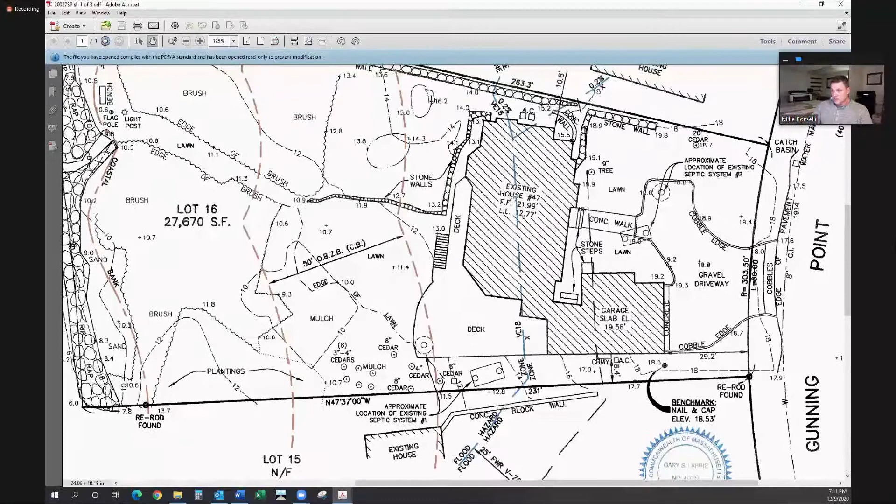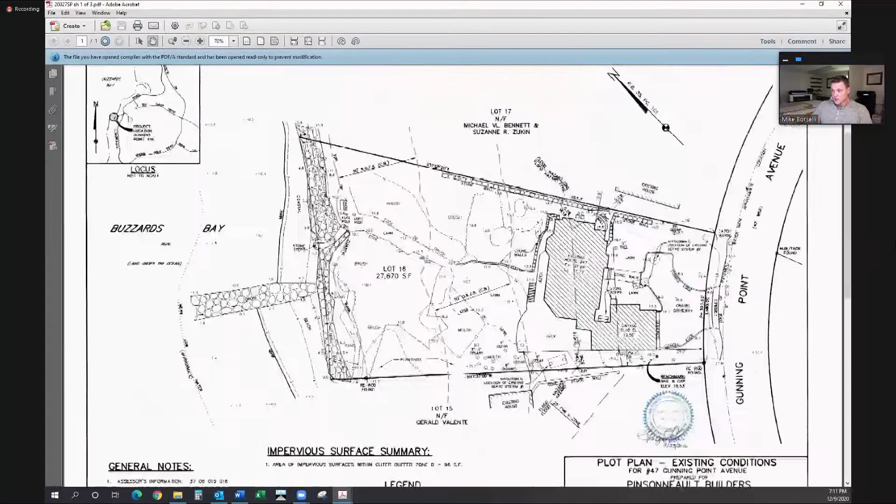In addition, a portion of the lot is in land subject to coastal storm flowage. In this case, it's flood hazard zone VE elevation 18, the boundary of which is shown as a blue line. It meanders through the site and through the existing house. And of course, parallel and 25 feet landward of that is the Falmouth Wetlands regulation velocity zone. So a significant portion of the existing house is in a velocity zone.

The site has typical landscaping and lawn and driveway areas. There's a septic system under the driveway, and there's actually 2 septic systems. There's another one over on this side of the property, both of which are to be pumped and removed and would no longer be part of the project, and a new Title V system will be installed.

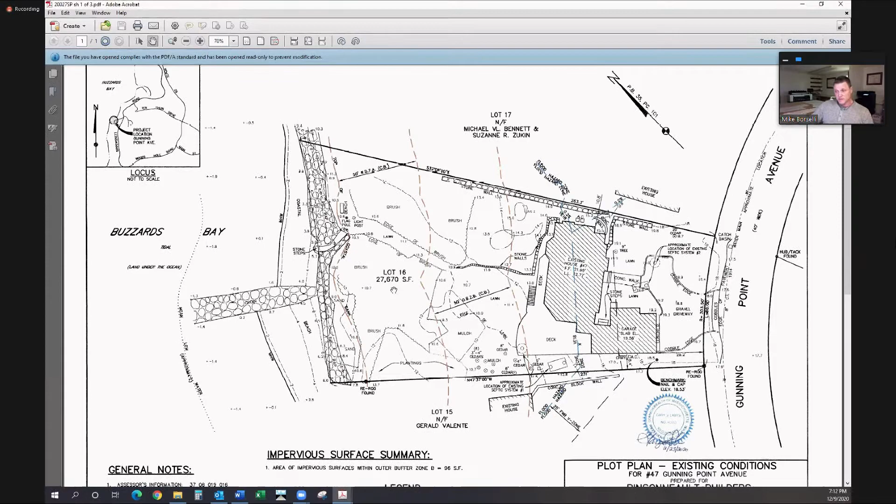There is a significant vegetated buffer located between the top of the revetment and the formal landscape portion of the yard. There is a path leading through the buffer. A lot of the buffer is natives, and there's also a lot of invasives. I've outlined here a small section of the structure, impervious surfaces in the outer buffer zone B.

The proposed plan. Oh, I'm sorry, there's the existing plan again. Now comes the proposed plan. And the proposed plan shows the house to be reconstructed. If you look closely, I've also added some notes that I'll speak to as I make the presentation. The proposed plan shows the outline of the existing house in a red delineation. So this is a raze and reconstruction project, and all of the work is proposed in the outer buffer zone B. No work is proposed in any no disturbance zone A. And the structure is effectively being rebuilt within the general same footprint with some slight deviations.

As I made reference to earlier, there are 2 existing septic systems that are proposed to be removed. A new Title V septic system will be installed in the driveway area, outside of all wetland resources, outside the buffer to the wetland resources, and outside all velocity zones.

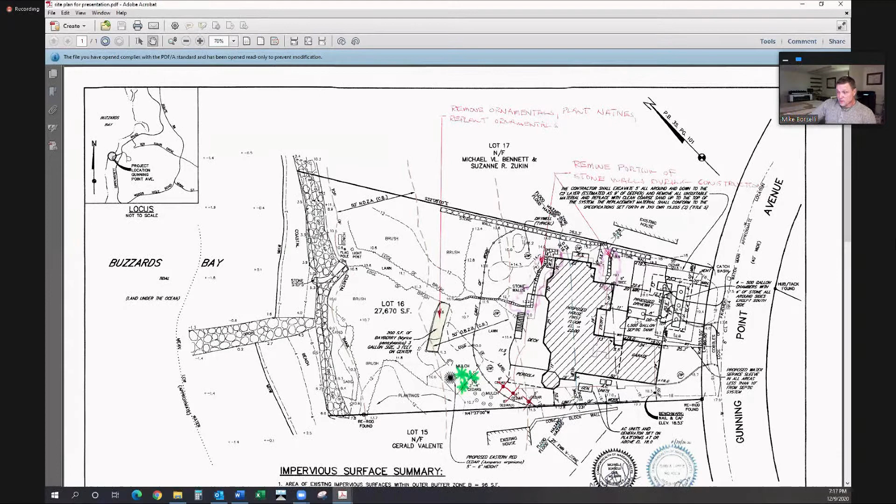Another matter raised by staff was what will happen to the existing stone walls. There are 2 landscape walls that ease the slope around the existing house. During the demolition and reconstruction of the house, these areas I've circled in highlighter would be removed and then reinstalled in the same place after the house construction occurs.

So they'd be temporarily removed during the demolition and then reinstalled and blended back in with the walls that would remain. The walls that would remain would be here, and then this wall along the property line. These are low profile landscape walls. So we will submit a revised plan that also indicates that.

So the site has been designed to meet the standards outlined in your regulations for redevelopment under FWR 10.18. All the disturbances proposed are in areas that were previously disturbed, and no additional alteration to buffer other than the cedar trees identified would occur.

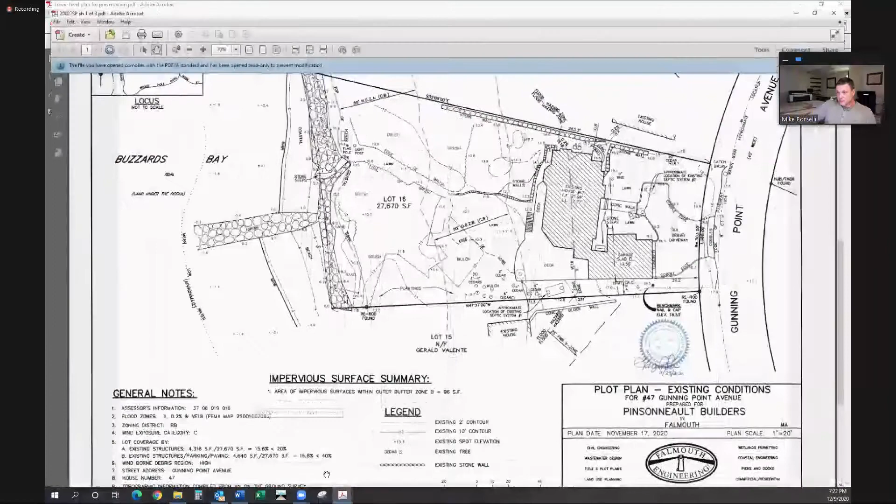I think I covered the project proposal, and I also touched on things that staff had brought up in the report in my conversations and how we intend to revise the plan. So we wanted to hear your comments and see if there are other revisions we may need to make. And then after that, request a continuance, submit revised plans, and hopefully be able to close the hearing at your next scheduled hearing night. And with that, I will be happy to answer questions.

Thank you, Mike. Jen, do you want to start? Sorry, I was on mute.

No, I think Mike gave a pretty detailed presentation, including the staff's concerns. Initially, we were having conversations with Mr. Borselli regarding the storage. And again, when we saw the plans and saw that there was a garage, which we usually allow that 400 square feet - that's kind of what the board's been doing when the entire structure is in a velocity zone and there is no enclosed space, such as a garage. So that kind of changed our thoughts a bit.

Mike was understanding to that. So that's great. Mike, the only other question I had - Alyssa did a great job of reviewing the plan and questioning certain aspects like the stone walls, the placement of the mitigation. So that was all addressed.

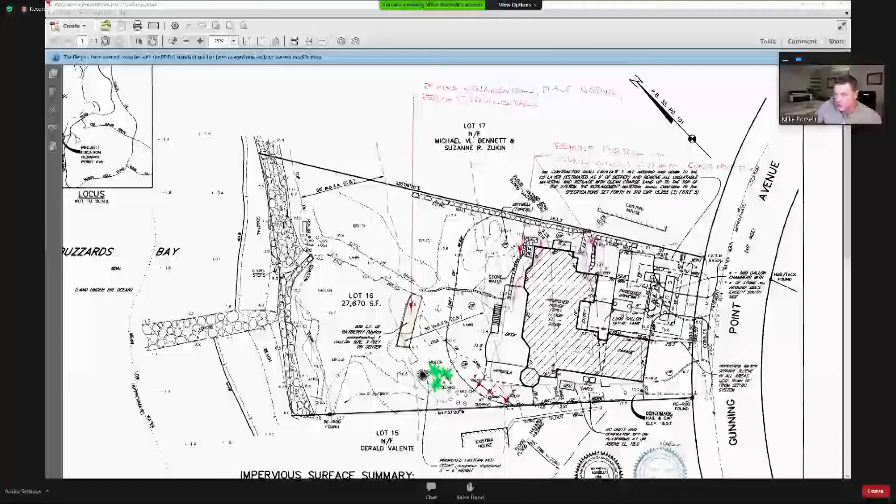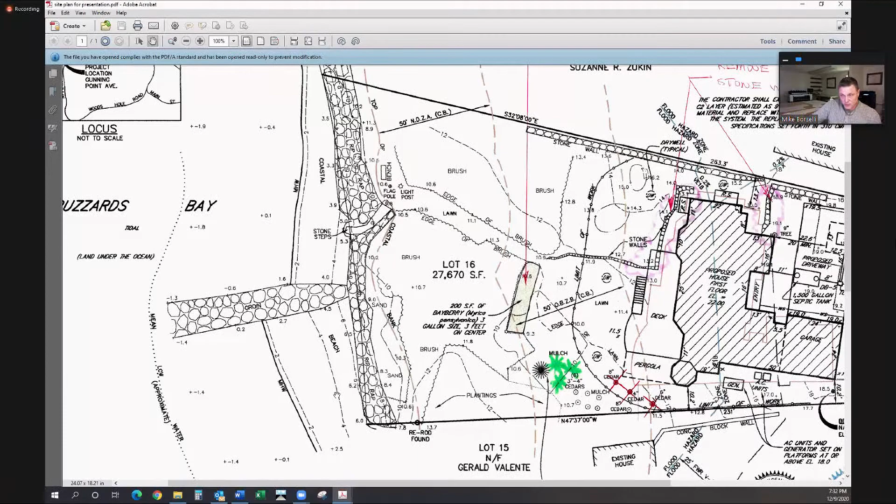Sure, thank you. So I believe Mr. Eater's talking about the fact that this line here isn't as thick as this one. That wasn't by intention. We will make that thick, and we will add right here that Salt Pond Area Bird Sanctuaries is an owner of a strip of land here. In fact, they were notified as an abutter, and we received an email from Katie Taylor of Salt Pond Area Bird Sanctuaries. So that'll be also revised and submitted on the revised plan.

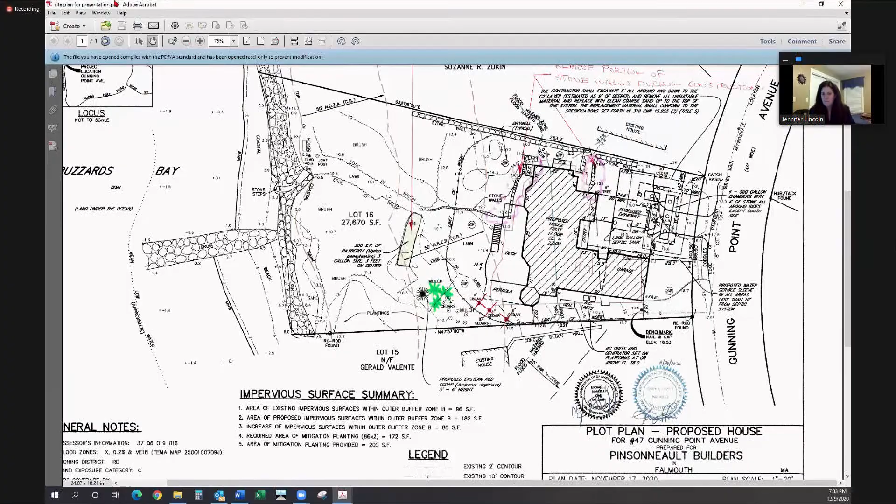Mike, can you stop sharing your screen, please? Oh, sorry, it's okay. Nope, that was the only chat, Mr. Chairman. Thank you.

Okay, Mike, I believe you have a request. Yes, Mr. Chairman, I know you're not meeting on the 23rd or the 30th. So you're meeting next week and then on the 6th. I can't submit the plans one week prior to the hearing for next week, so I'm asking for a continuance to January 6th.

Mike, can you also make sure the architect gives us a revised A7 plan showing that enclosure, please? I believe that's the only one that shows that. Any of the textuals that depict that would be great, might be A7 and A2. Will do, thank you.

All right, anybody? At the request of the applicant, propose a continuance to January 6th, 2021.

Second, Gladfelter, and I have a question. Actually, it's not a question, it's a comment to Mike. I don't know if this is the end of the year comment, but not only were the plans clear, but your presentation, you put a lot of thought into the order of the presentation. Oh, thanks, I appreciate it. Thank you, 35 years, I'm finally figuring it out.